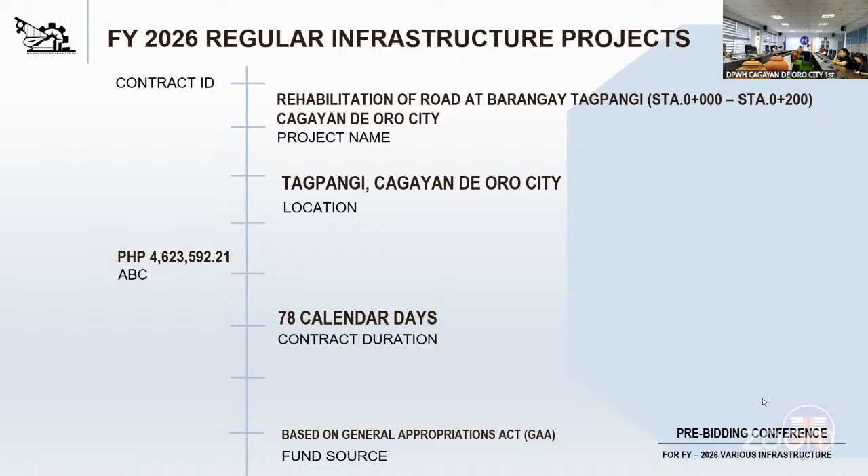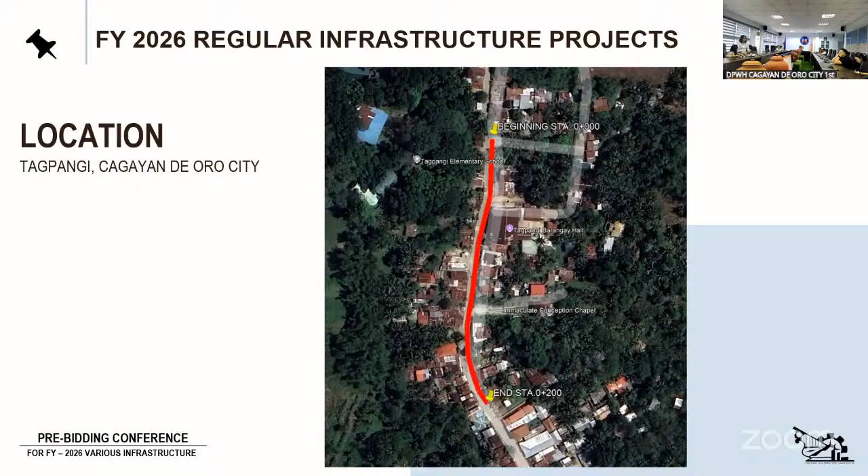The major landmark of the project is the Tagpangi Barangay Hall or Tagpangi Covered Court. This is the plan and profile of the project.

As you can see, the entire length of 200 meters has existing damaged or bad condition pavement to be removed and replaced with new PCCP. Then we have the additional proposed drainage system starting at station 0+80, the start of the proposed line canal, tapping to the existing line canal. Station 0+172 is the end of the proposed line canal.

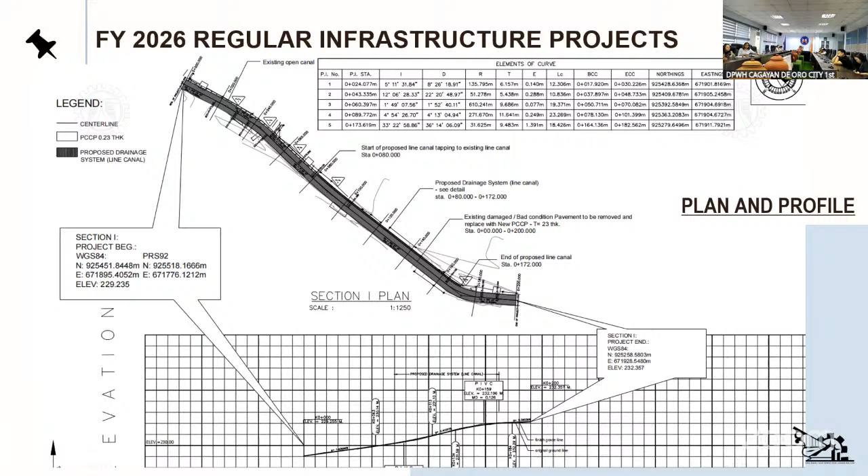This is the beginning and end of the new line canal. The beginning at station 0+80 is near the covered court, tapping to the existing line canal, and the end at station 0+172 is near the Soday store.

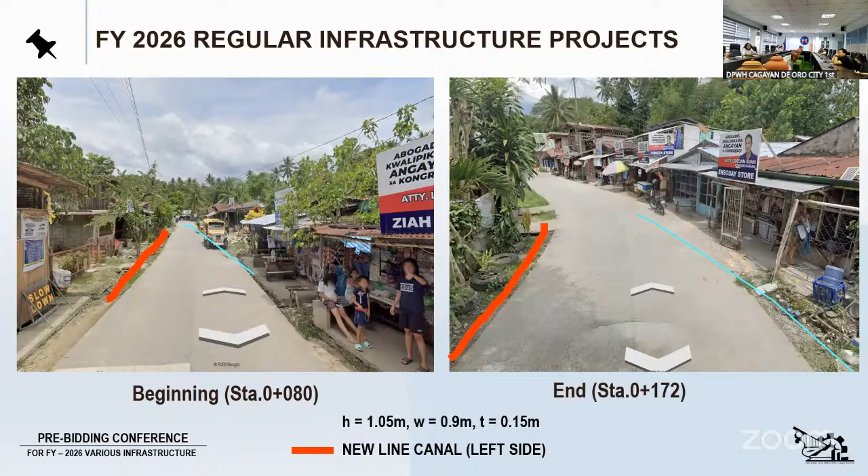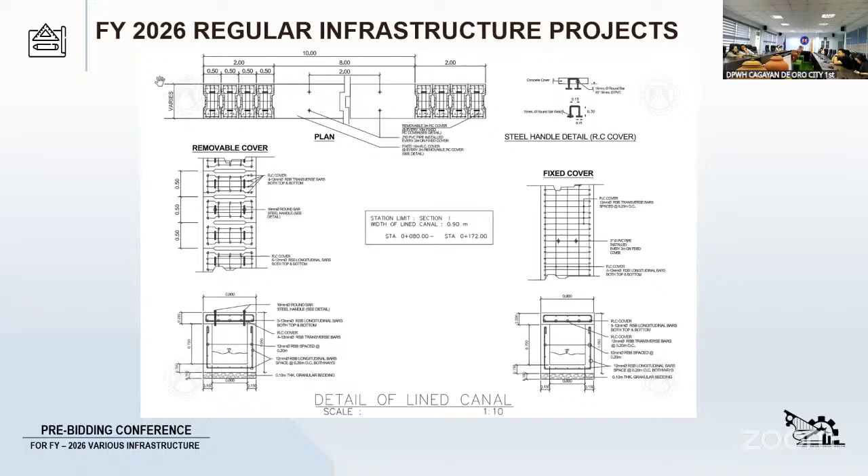This is the summary of quantity. In Part B, other general requirements: permits and clearances, 1 lump sum; project billboard or signboard, each; occupational safety and health program, 1 lump sum; traffic management, 1 lump sum; mobilization and demobilization, 1 lump sum. In highways, bridges and airports: removal of actual structures or obstruction; 0.23 meter thick PCCP unreinforced, 1,000 square meters; surplus common excavation, 407.10 cubic meters; structure excavation common soil, 86.94 cubic meters; embankment from borrow, common soil, 8.3 cubic meters; aggregate base course, 200 cubic meters; Portland cement concrete pavement unreinforced, 0.23 meter thick, 7 days, 1,000 square meters. In building, ports and harbors, flood control and drainage structure and water supply system: earthwork, gravel fill, 8.28 cubic meters.

In structural concrete, 4,000 PSI, Class A, 28 days, 48.3 cubic meters; reinforcing steel deformed grade 40, 3,954.65 kilograms.

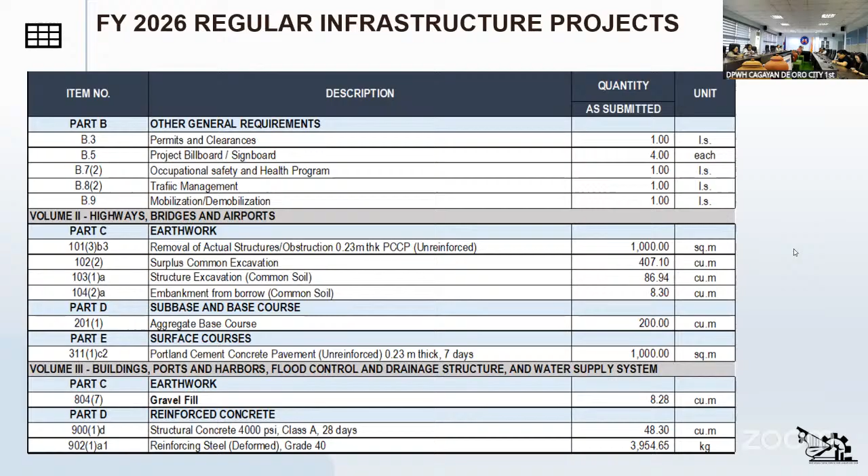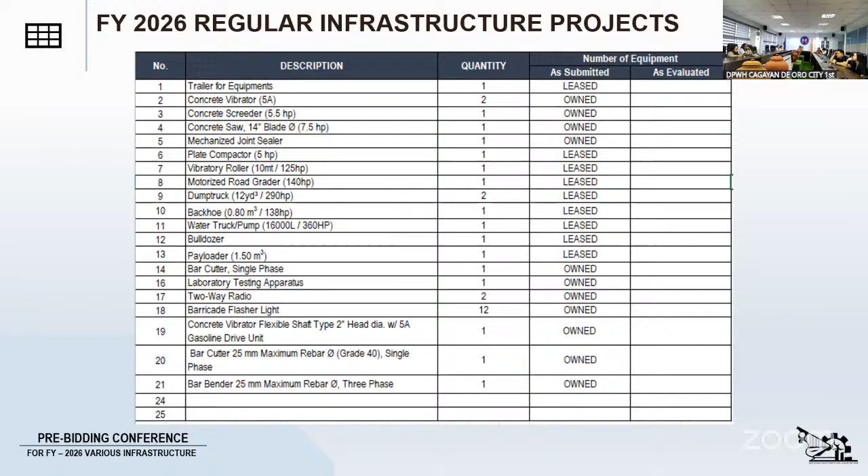Okay, and this is the end of my presentation. Thank you.

Thank you, Engineer Noynay. Do we have any questions, sir? How about the online viewers? There's none. Okay, let's proceed to the next project.

With contract ID number 26KH0042, Rehabilitation of road at Barangay Tuburan, Station 0.00 to Station 0+200, Cagayan de Oro City, Misamis. Engineer Calizo.

Good afternoon, everyone. On behalf of the designer and programmer, I will be presenting this project: Rehabilitation of road at Barangay Tuburan, Station 0 to Station 200. We have here a 200-meter length project with an ABC of 4,624,082.79, with 73 calendar days.

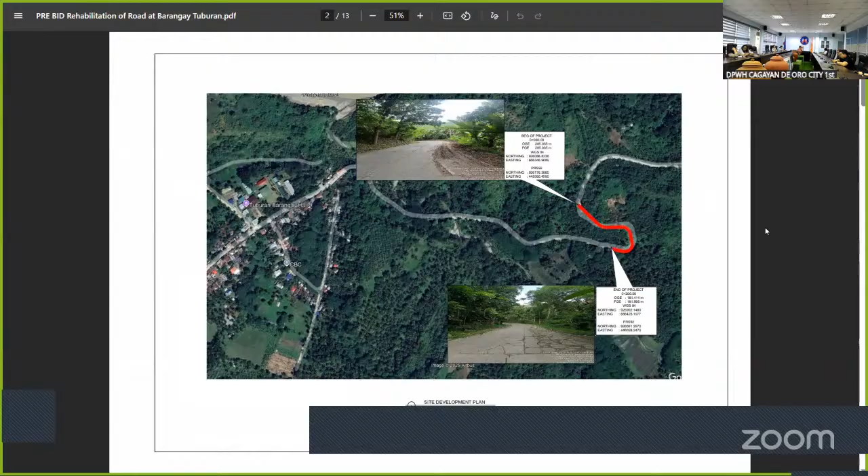Before we start, we have here the material testing requirements and equipment requirements: two-way radio, 3 units; barricade flasher light, 10 units; trailer for equipment, 1 unit; trailer for minor tools, 1 unit; backhoe with pavement breaker, 1 unit; payloader, 1 unit; dump truck, 2 units; concrete saw, 1 unit; bulldozer, 1 unit; backhoe, 1 unit; motorized road grader, 1 unit; vibratory roller, 1 unit; water truck pump, 1 unit.

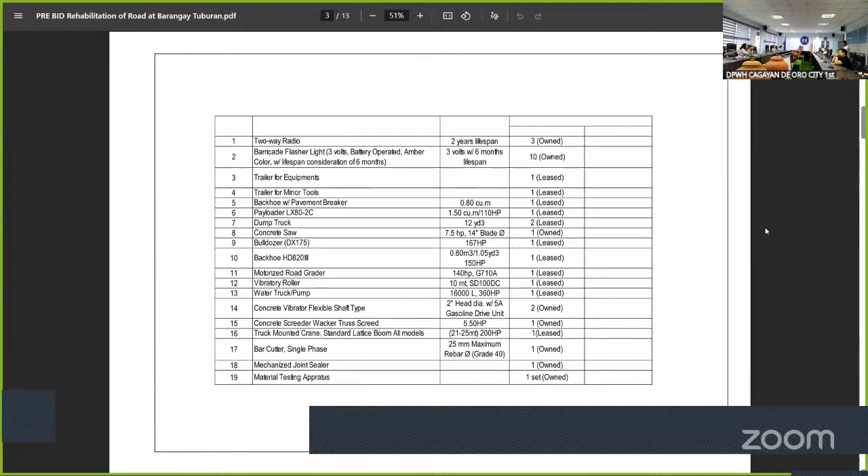Concrete vibrator, 2 units; concrete screeder, 1 unit; truck mounted crane, 1 unit; bar cutter, single phase, 1 unit; mechanized joint sealer, 1 unit; material testing apparatus, 1 set; plate compactor, 1 unit; bar bender 3 phase, 1 unit; and cargo service truck, all models, 1 unit. For our summary of quantities: B.3 permits and clearances, 1 lump sum.

B.5 project billboard and signboard, four each. B.7.2 occupational safety and health program, 1 lump sum. B.8.2 traffic management, 1 lump sum. And B.9 mobilization, demobilization, 1 lump sum.

For our earthworks, we have 1013B3 removal of actual structures, obstruction, 0.23 meters thick PCCP unreinforced, 1,000 square meters. 1022 surplus common excavation, 229.12 cubic meters. 1031A structure excavation, common soil, 13.5 cubic meters. 1042A embankment from borrow, common soil, 53.58 cubic meters.

For sub-base and base course, 2011 aggregate base course, 183 cubic meters. For surface courses, 3111C2 Portland cement concrete pavement, unreinforced, 0.23 meters thick, 7 days, 1,220 square meters. For miscellaneous structures, 6121 reflectorized thermoplastic pavement marking white, 49.45 square meters; 6122 reflectorized thermoplastic pavement marking yellow, 12 square meters; and 6249C1 single arm solar LED roadway lighting, 9 meters, 80 to 125 watts, 5 each.

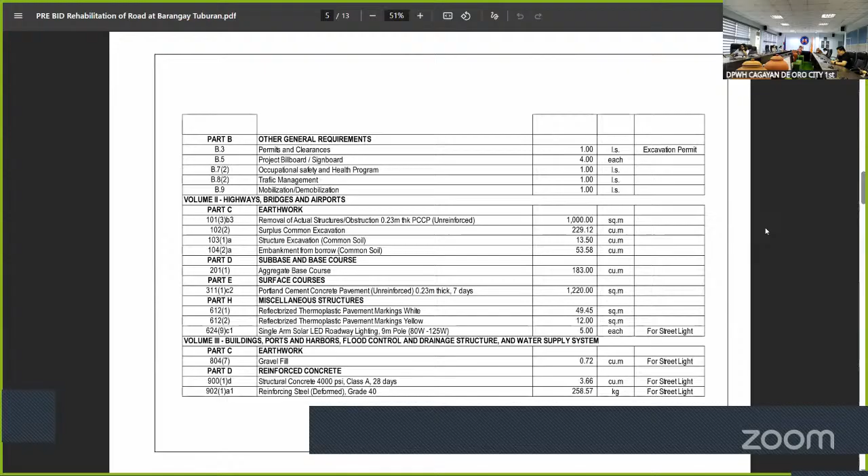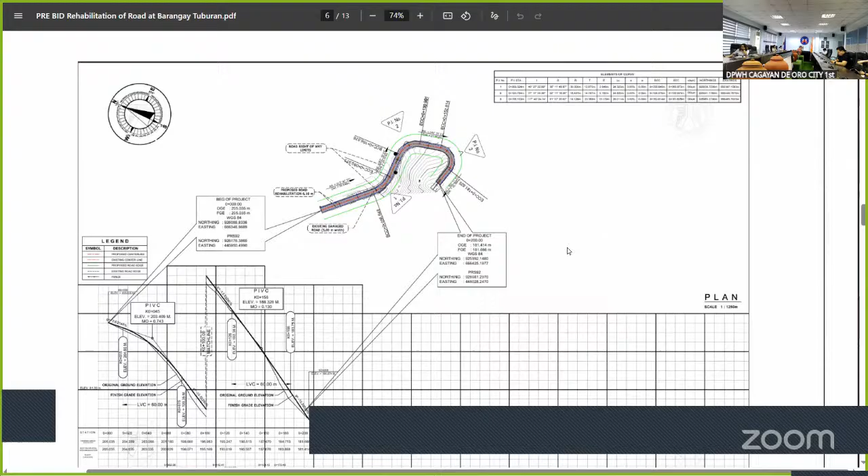For our typical sections, we will be having 3.05 meters with PCCP on both sides. You can see here the typical sections, also with sections that have solar street lights, thickness of 0.15 meters aggregate base course and 0.23 meters thick PCCP.

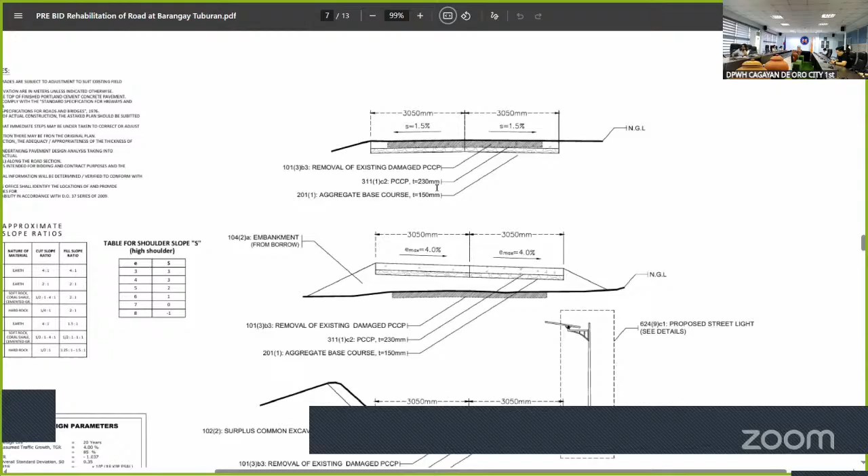We also have here the details of the typical pavement markings, since we will be having pavement marking along the rehabilitation of the road. These are the details of our reblocking.

And for our cross sections, we have here road soil test reports as attachments for the site, and also our road right-of-way attachments.

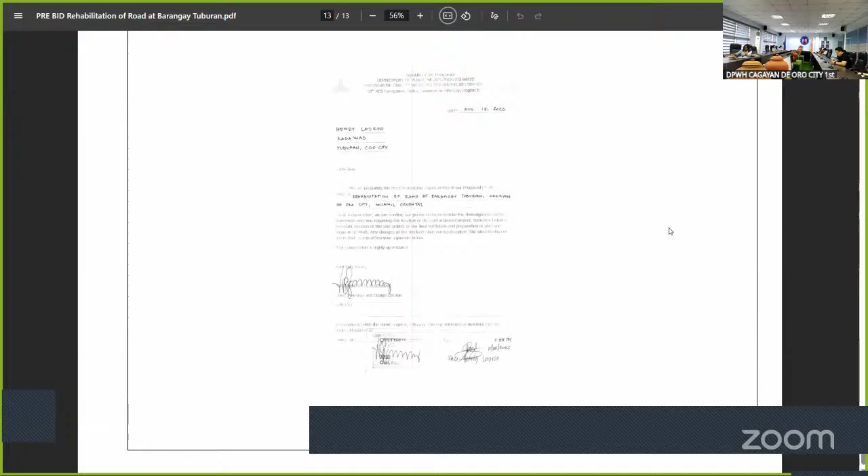So that's all for this project. Thank you, and any questions?

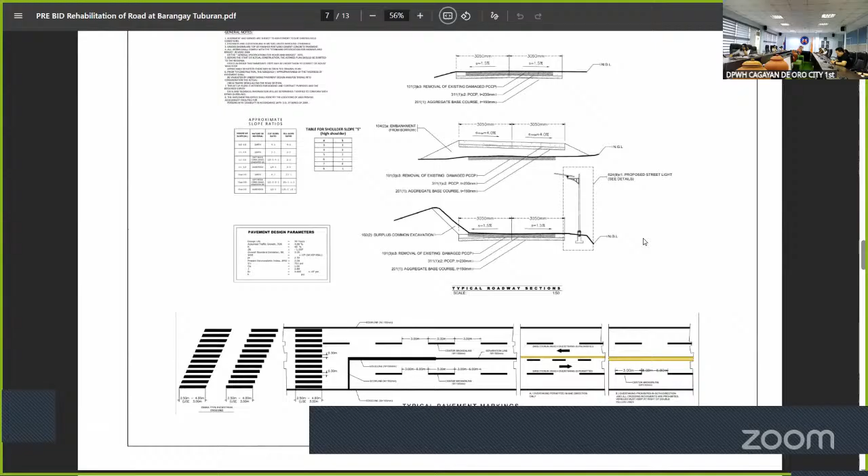Let's proceed to the next project, with contract ID number 26 AH 0043, rehabilitation of road, Barangay Besigan, station 0+00 to station 0+200 of this city, to be discussed by Engineer Kalis. Good afternoon again, everyone. Rehabilitation of road at Barangay Besigan, station 0 to station 200, Cagayan de Oro City, Misamis Oriental.

We have a station 0 to station 200 with a net length of 200 meters. Approved budget for the contract is 4,622,247.02, with project duration of 74 calendar days. The scope of work is

construction or improvement of existing road to gravel or paved road with width of 2.5 meters both sides and thickness of 0.2 meters thick PCCP. We also have construction of gravel shoulder with width of 0.7 meters both sides and construction of RC pipe culverts, slope protection, grouted riprap and stone masonry.

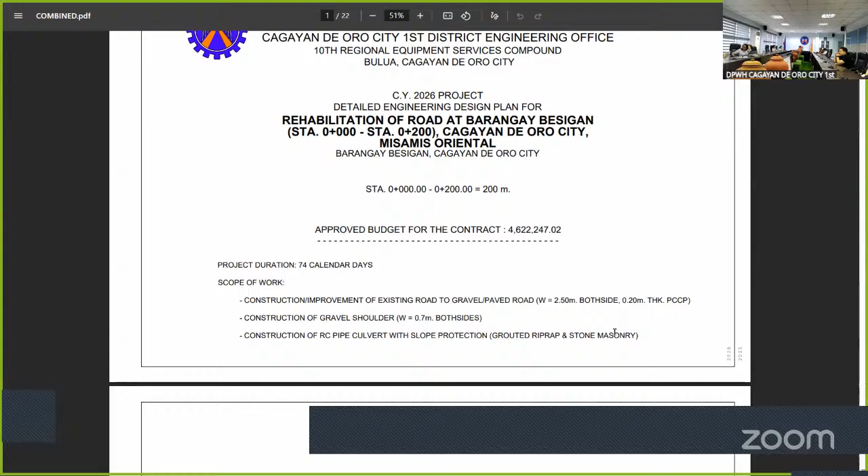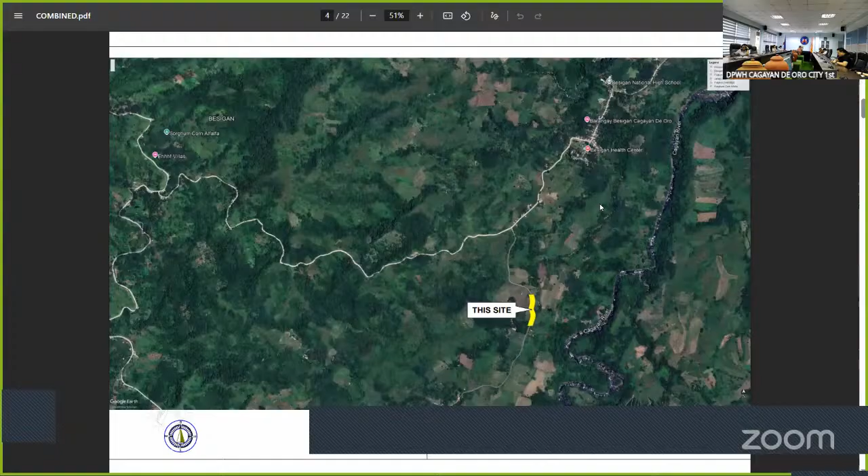So general drawing is located at Barangay Besigan. This is the location map, after Barangay Besigan. For specifics, this is situated at Barangay Sitio Kibanog.

This is our site development plan. This is after the previous project of ours, our FMR at Sitio Kibanog. So we will be just continuing the project.

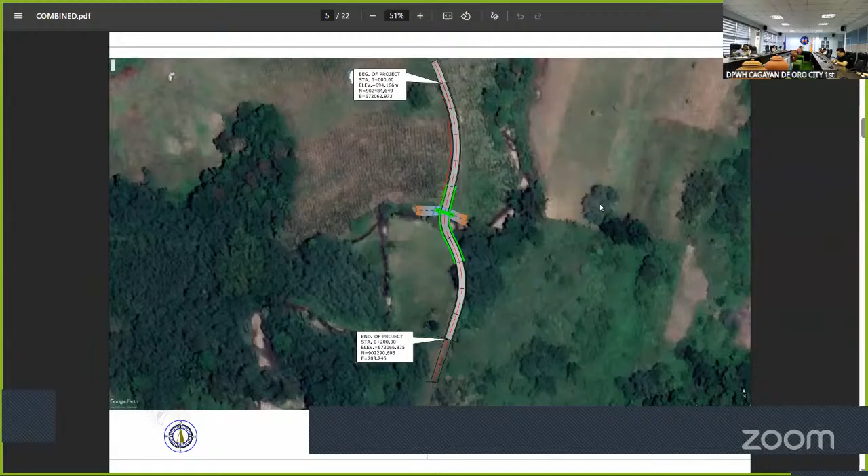This is the site development plan. We also have here the disposal map and geotag pictures of the site. Again, we will be crossing a waterway, which will be discussed on the plan.

For our plan and profile, this is our plan and profile. Again, we will be crossing a natural waterway, which will be implementing RC pipe culverts, to be discussed later. This is the plan and profile and the elevations of the pipe culvert.

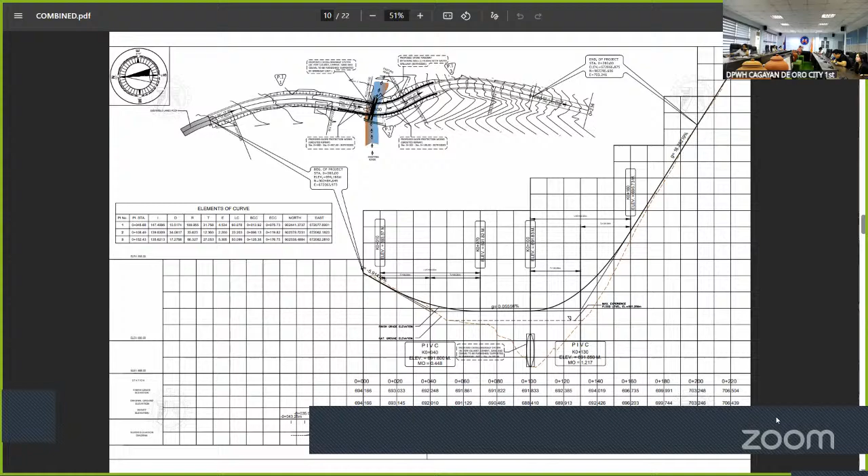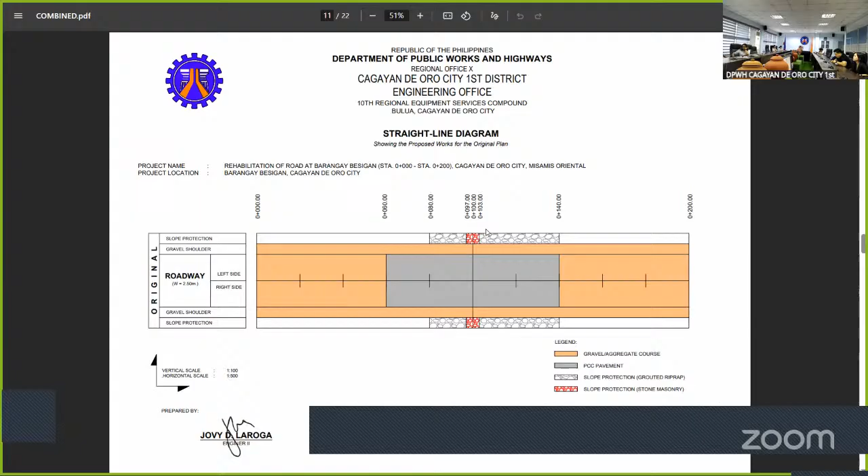This is the straight line diagram showing this project will have a whole stretch of 200 meters aggregate base course, just a base course. Then you can see here the gray one, this will be the station limit of only the PCCP pavement for the carriageway. Also shown here are the stations of the slope protections, in the section of the waterway.

For our typical drawings, these are the typical drawings. Again, from what I mentioned earlier, typical section 1, the whole stretch will be having the aggregate base course, thickness of 0.1 meters thick. There's also a station limit here, as you can see in the table, where the PCCP carriageway will be. We will have an 80 meters carriageway and gravel carriageway of 120 meters.

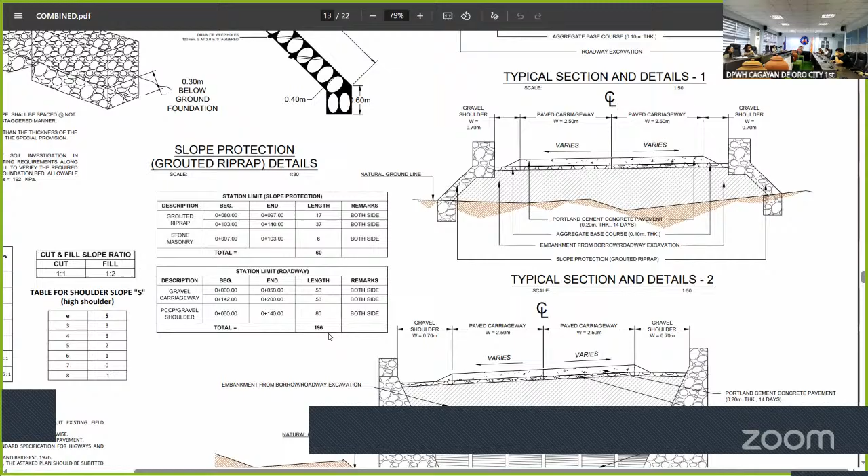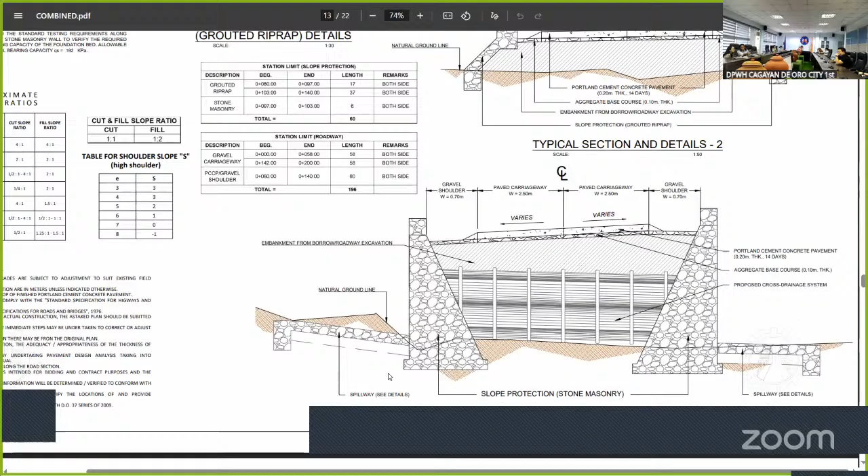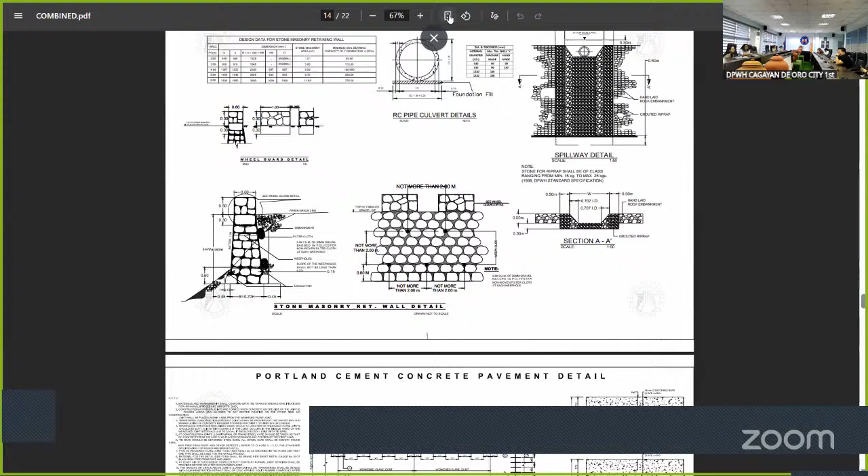These are also the details for the slope protections. We will be having the grouted riprap before the waterway, and as for the waterway, we will be having slope protection of stone masonry in between erected RC pipe culverts. We also have installations of spillways on both sides. These are the details of the slope protections, the stone masonry and its wheel guards.

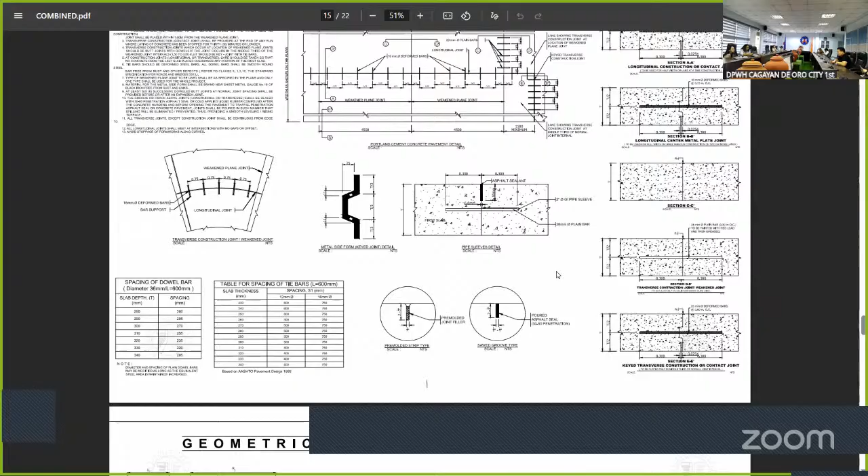So for our PCCP details and geometric design standard drawings.

For our summary of quantities, we have here B.3 permits and clearances, 1 lump sum. B.5 project billboard signboard, 4 each. B.7.2 occupational safety and health program, 1 lump sum. B.8.2 traffic management, 1 lump sum. B.9 mobilization demobilization, 1 lump sum.

1041A embankment from roadway structure excavation, common soil, 219.05 cubic. 1042A embankment from borrow, common soil, 938.76 cubic. 2011 aggregate base course, 139.03 cubic. 3111B1 Portland cement concrete pavement, unreinforced, 0.2 meters thick, 14 days, 400 square meter. 5001E culverts, class 4 RCPC, 18 linear meter. 5052A grouted riprap, class A, 187.62 cubic. 5061 stone masonry, 69.79 cubic.

For our minimum equipment requirement, we have here backhoe, 1 unit, payloader, 1 unit, motorized road grader, 1 unit, vibratory roller, 1 unit, water truck pump, 1 unit, plate compactor, 1 unit, transit mixer, 4 units, concrete vibrator, 2 units, concrete batch plant, 1 unit, concrete spreader, 1 unit, concrete saw, 1 unit, bar cutter single phase, 1 unit, joint sealer machine, 1 unit, 1 bagger mixer, 1 unit, backhoe wheel mounted, 1 unit, material testing apparatus, 1 unit, two-way radio, 2 units, and barricade flasher light, 12 units.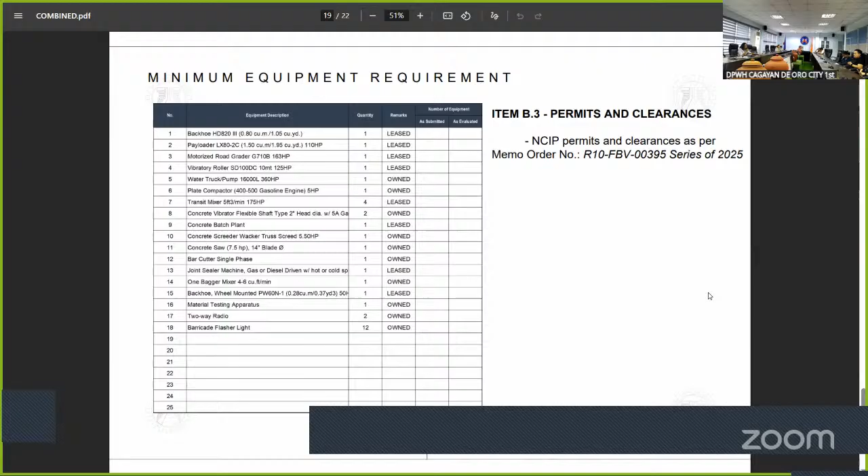Rehabilitation of road at Barangay Pigsag-an, Station 0 to Station 200, Cagayan de Oro City, Misamis Oriental. Net length of 200 meters with an ABC of 4,607,919.87 and project duration of 72 calendar days.

Scope of work is rehabilitation of existing road with PCCP width of 2.5 meters both sides, 0.28 meters thick, since we will be improving the existing paved road. There's also an installation of solar street lights.

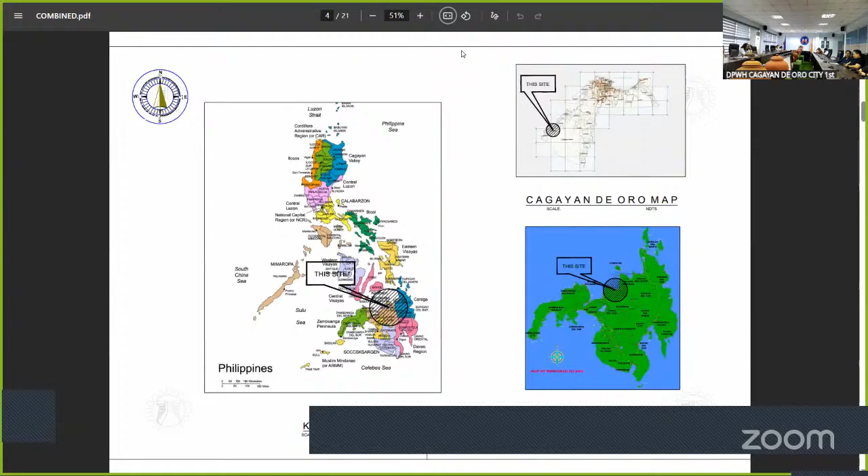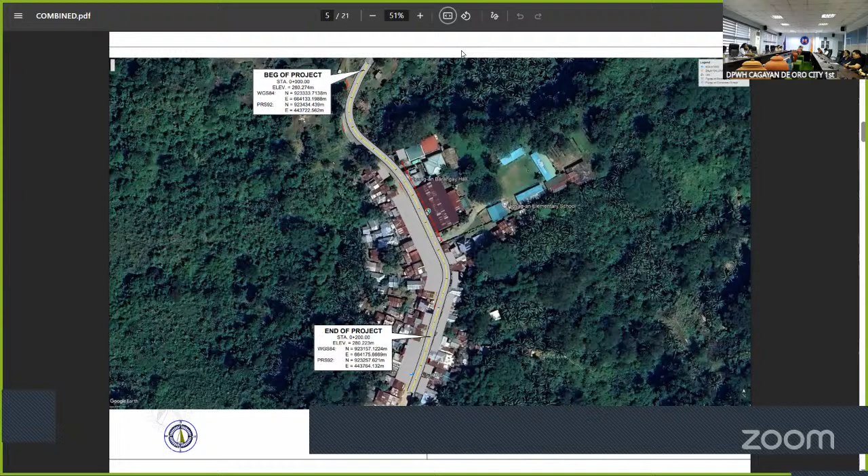General drawing, it is located in Barangay Pigsag-an. For specifics, this is the site development plan, situated in front of Pigsag-an Barangay Hall. So we will have a 200 meters rehabilitation of the existing road.

So for our plan profile, we have here the plan profile, also accompanied with the stationing of our solar street lights. We have 3 solar street lights situated where there's availability of space. We have here the stationing of street lights.

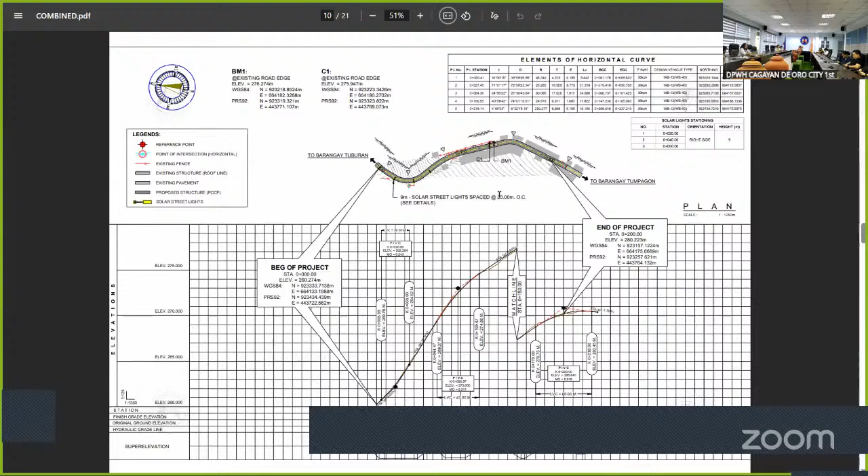So for our straight line diagram, this is the straight line diagram. We will just be having rehabilitation of roadway, a width of 2.5 meters, also the installation of solar LED roadway lighting.

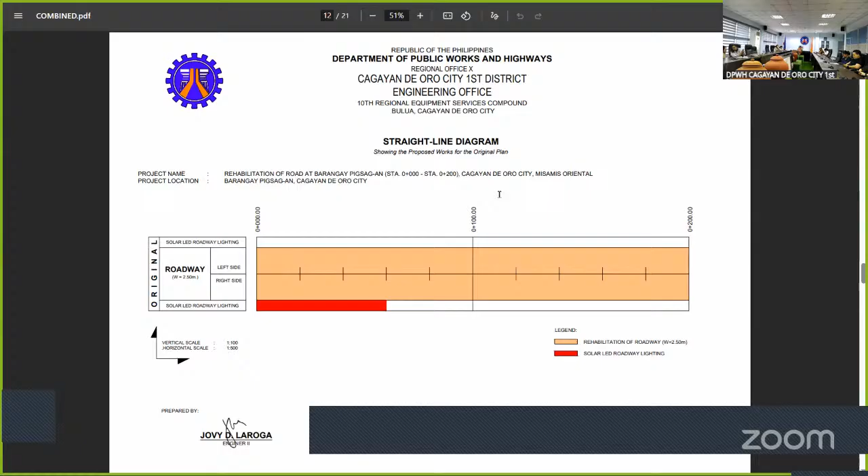For our summary of quantities, we have here B.31 permits and clearances, 1 lump sum; B.5 project billboard and signboard, 4 each; B.72 occupational safety and health program, 1 lump sum; B.81 traffic management, 1 month; B.9 mobilization demobilization, 1 lump sum.

1013B3 removal of actual structure obstructions, 0.23 meters thick, PCCP unreinforced, 1,000 square meter. 1022 surplus common excavation, 496 cubic meter. 1031A structure excavation common soil, 4.75 cubic. 1047 gravel fill, 0.43 cubic.

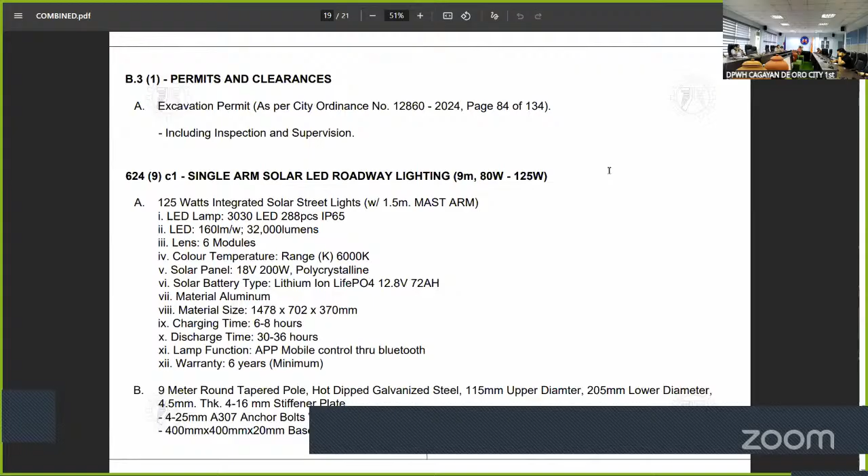So that's all for this project. Thank you, and any questions?

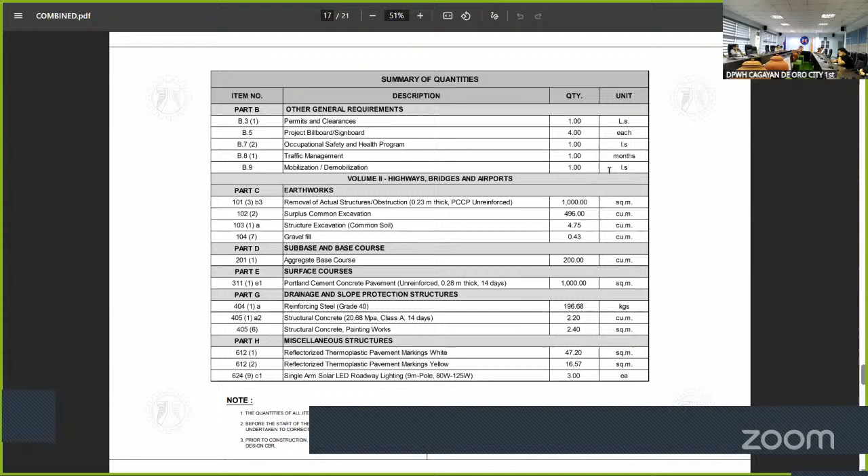Ms. Aguilar, since there is no questions, let's proceed to the last project to be discussed also by Engineer Talisa. The contract ID is 26AH0045, rehabilitation of road, Barangay Tumpagon, station 0+00 to station 0+200, PCCP.

Rehabilitation of road at Barangay Tumpagon, Station 0 to Station 200, Cagayan de Oro City. Net length of 200 meters. ABC of 4,624,593.77, and project duration is 65 calendar days.

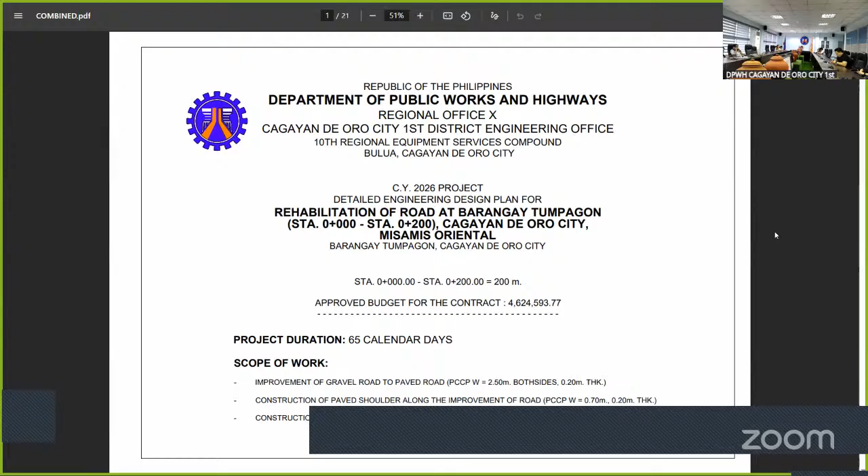Scope of work is improvement of gravel road to paved road, PCCP, with width of 2.5 meters both sides, and thickness of PCCP is 0.2 meters thick. There's also a construction of paved shoulder along the improvement of road with width of 0.7 meters, thickness of 0.2 meters thick, and also construction of open line canal along the improvement of road with material grouted riprap.

So general drawing, it is located in Barangay Tumpagon. This is the site image or the location map. It is situated before the Tumpagon National High School.

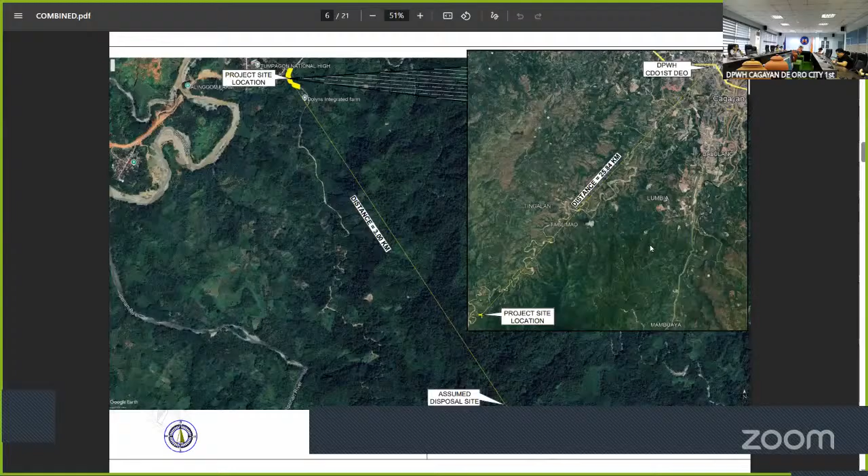So this is the site development plan. So this is the disposal site plan. And for the images, this is the site image of the beginning section. You can see here, this is before we arrive at the center of Tumpagon. So this will be our project.

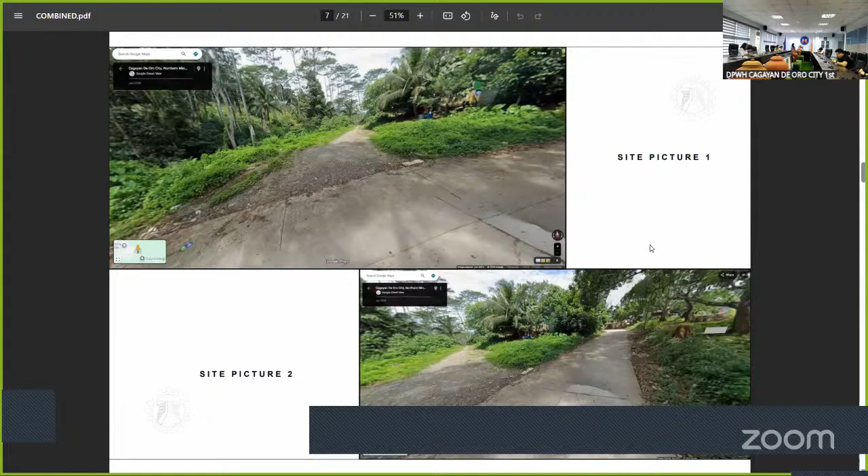For plan profile, this is the plan profile for the 200-meter project. We also have a solar street light inclusion. So there's also a stationing of the solar street lights inclusion.

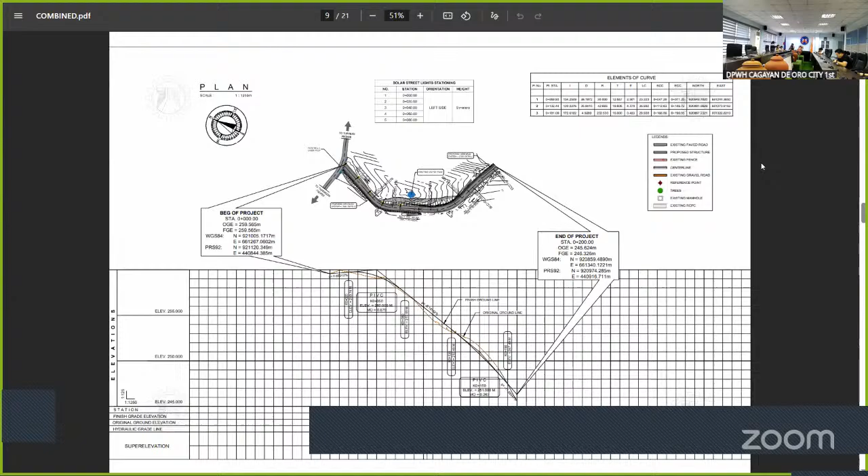So these are our straight line diagram, where we will just be having an improvement of the existing gravel road to paved road, and also the construction of line canal. Both sides of every line canal has its own natural waterway, natural outfall, and also the indication of the solar street light stationing.

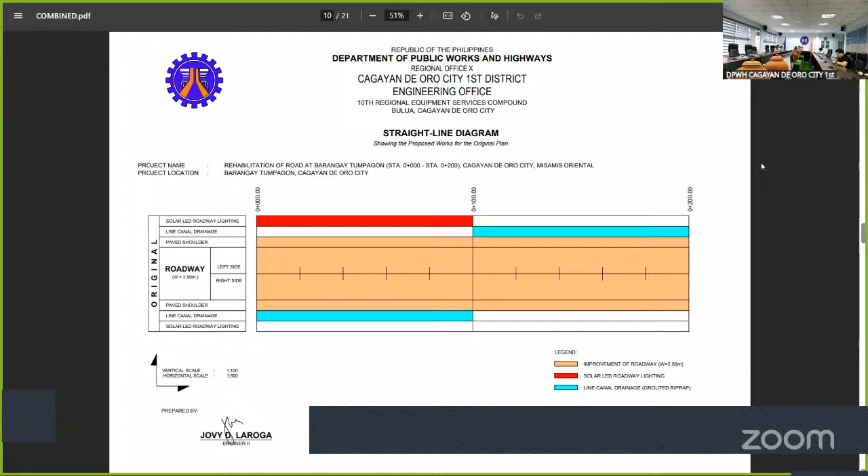So for our typical drawings, this would be our typical section. We will be having 2.5 meters width both sides and additional 0.7 meters both sides shoulder, and construction of line canal, grouted riprap, and also the installation of solar street lights. There's also an inclusion of reflectorized thermoplastic pavement marking. You can see the details on the left side.

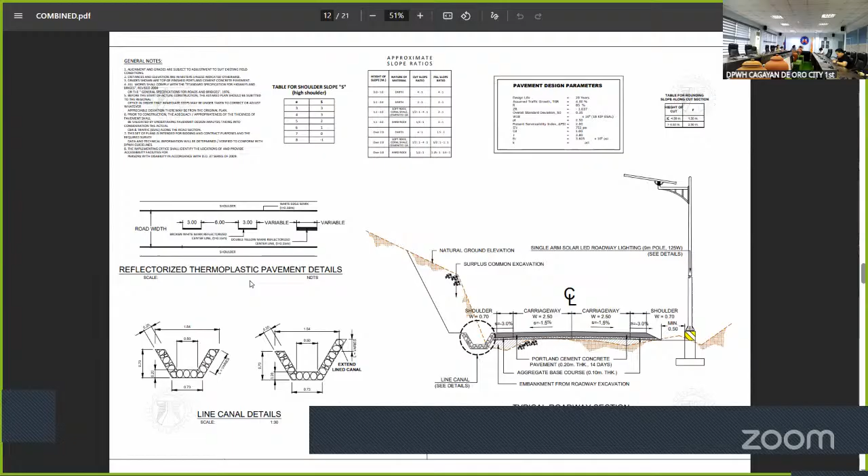So these are the details of our PCCP. Geometric design standard drawings.

So for our summary of quantities, we have here B.3 permits and clearances, 1 lump sum; B.5 project billboard and signboard, four each; B.7, occupational safety and health program, 1 lump sum; B.8, traffic management, 1.43 months; B.9 mobilization demobilization, 1 lump sum; 1022 surplus common excavation.

1,668.46 cubic meters; 1031A structure excavation common soil, 7.92 cubic meters; 1041A embankment from roadway structure excavation common soil, 160.03 cubic meters; 1047 gravel fill, 0.72 cubic meters; 2011 aggregate base course, 141.16 cubic meters.

3111B1 Portland cement concrete pavement unreinforced, 0.2 meters thick, 14 days, 1,280 square meters; 4041A reinforcing steel grade 40, 327.8 kilograms; 4051A2 structural concrete 20.68 megapascal class A, 14 days, 3.66 cubic meters; 4056 structural concrete painting works, 4 square meters.

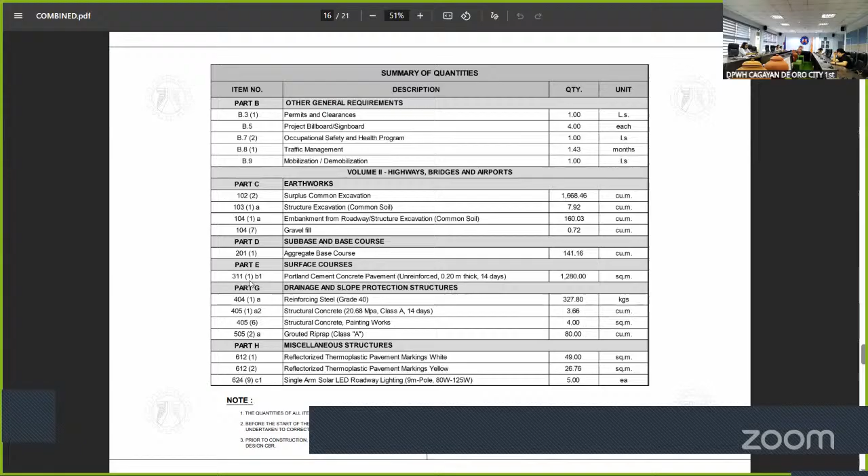5052A grouted riprap class A, 80 cubic meters; 6121 reflectorized thermoplastic pavement markings white, 49 square meters; 6122 reflectorized thermoplastic pavement marking yellow, 26.76 square meters; 6249 C1 single arm solar LED roadway lighting, 9 meter pole, 80 to 125 watts, 5 each.

For our minimum equipment requirement, we have here backhoe 1 leased, dump truck 2 owned, bulldozer 1 leased, payloader 1 leased, motorized road grader 1 leased, vibratory roller 1 leased, water truck pump 1 owned, plate compactor 1 owned, transit mixer 4 leased, concrete vibrator 2 owned, concrete batch plant 1 leased, concrete skidder 1 owned, concrete saw 1 owned.

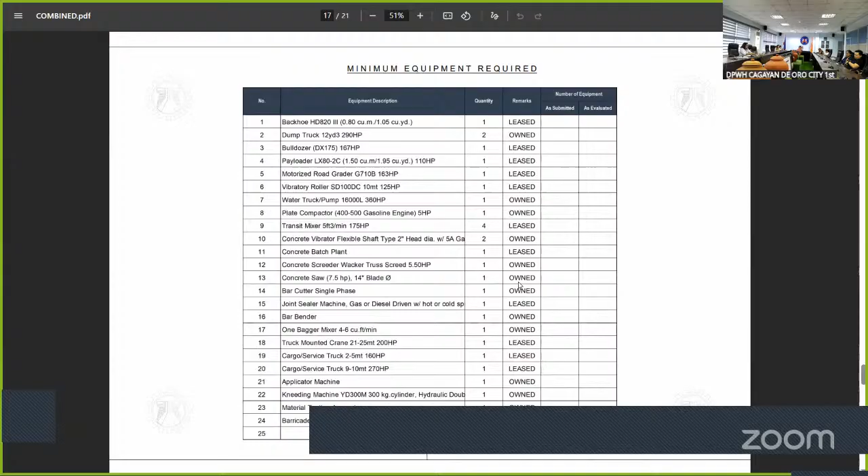Bar cutter 1 owned, joint sealer machine 1 leased, bar bender 1 owned, bagger mixer 1 owned, truck mounted crane 1 leased, cargo service truck 2 to 5 metric ton 1 leased, cargo service truck 9 to 10 metric ton 1 leased, applicator machine 1 owned, kneading machine 1 owned, material testing apparatus 1 owned, and barricade flasher light 4 owned.

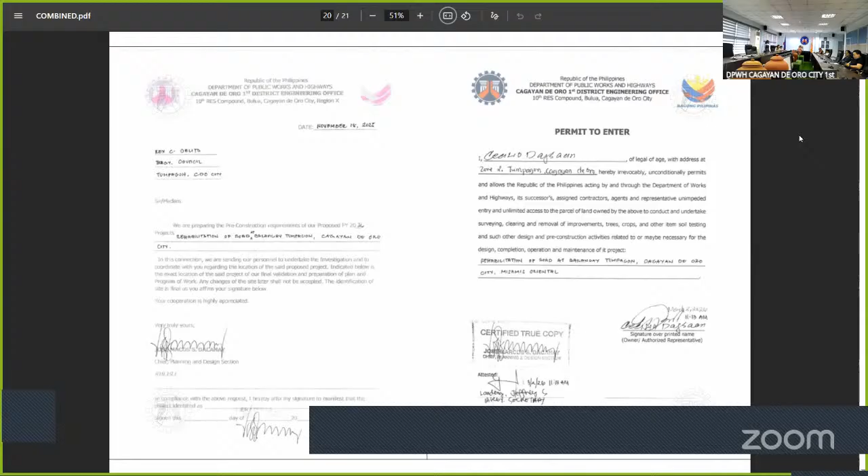So for our permits and clearances, we have here an inclusion of NCIP permits and clearances as per memo order number R10 FBV 00395 series of 2025, and also our specifications of our single arm solar LED roadway lighting. We also have here our attachments for our road right of ways, and our soil test reports.

So that's all for this project. Thank you, and any questions?

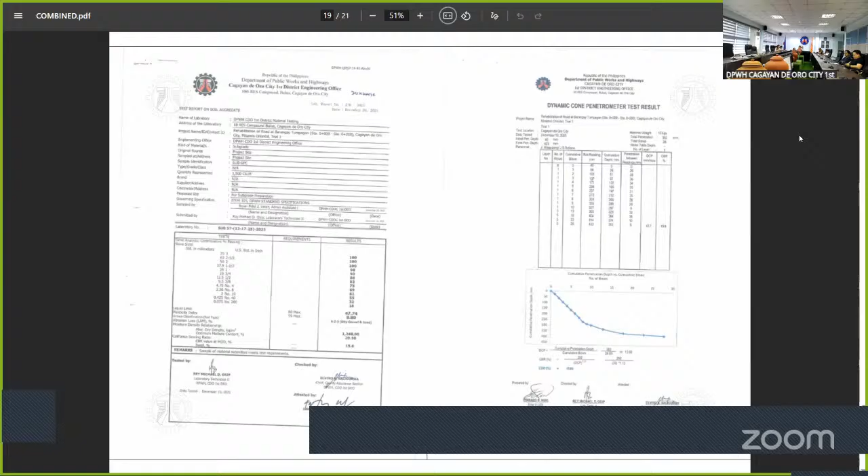Okay, Liz, thank you.

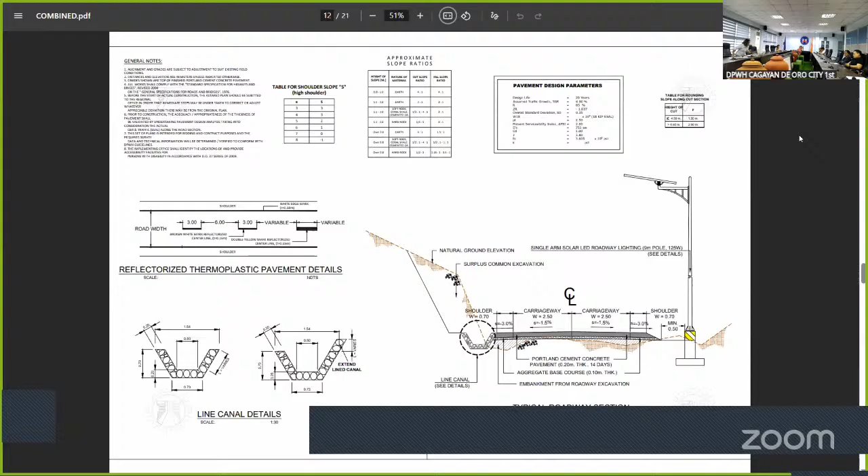Next, we will now go through the salient provisions of the bidding documents to be discussed by our bids and awards committee secretariat. May we request Engineer Galudo to discuss the requirements for the eligibility and financial, also the schedule of the bidding or the opening.

Okay, Chair. Go ahead. Good afternoon, Madam Chair, and good afternoon, everyone. I will be discussing the procurement requirements and procedures for this civil works project.

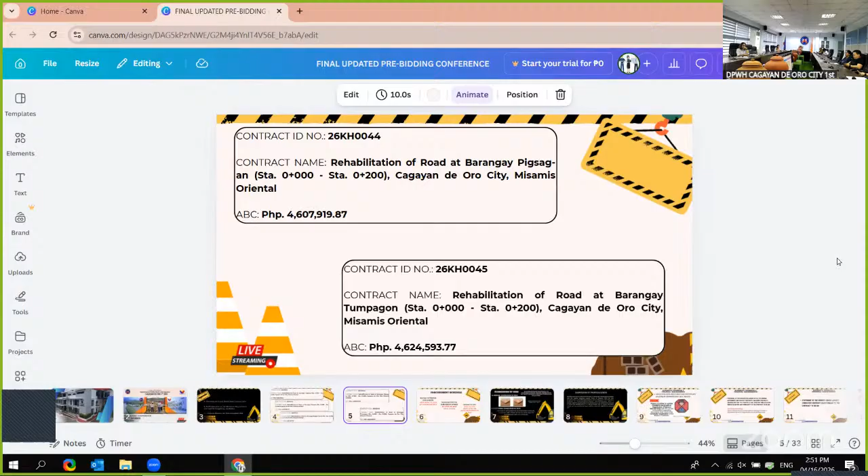So for the procurement schedule, the buying of tender documents is until April 29, 2026 at 12 noon only. The deadline for the submission of bids will be on April 29, 2026 until 2 p.m. And the opening of bids will follow right after the deadline.

Excuse me, the buying, I'll repeat, the buying of tender documents is until, it's morning, April 29, 2026. Currently, sorry for the technical issue with the presentation.

Okay, for the procurement schedule, the buying of tender documents is until April 29, 2026 at 9:30 AM only. The deadline for the submission of bids will be on April 29, 2026 until 10 AM. And the opening of bids will follow right after the deadline or the drafting of bids.

For the bid submission, it may be done manually or electronically. However, bidders should only select one mode, either manual or electronic. For the manual submission, we have the two envelope system, wherein the first envelope contains the technical components of the bids, and the second envelope will contain the financial component of the bids. These envelopes have the original, copy 1, and copy 2 of the bidding documents. For the electronic submission, the details are stated in the bid data sheet in accordance with Department Order 87 series of 2020.

Bid proposals may be submitted through an authorized representative together with the original notarized special power of attorney or SPA for sole proprietorship, or board or partnership, or joint venture resolution with secretary's certificate for corporations, partnerships, joint ventures, or cooperatives, which is contract specific, presentation of any company ID or any government issued ID, to ensure that their representative is an official member and to prevent fraudulent actions such as unauthorized use of another contractor's eligibility for personal gain.

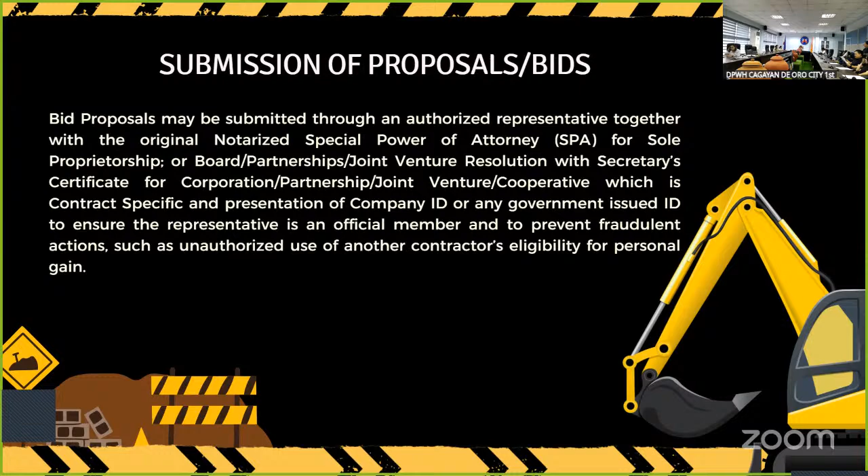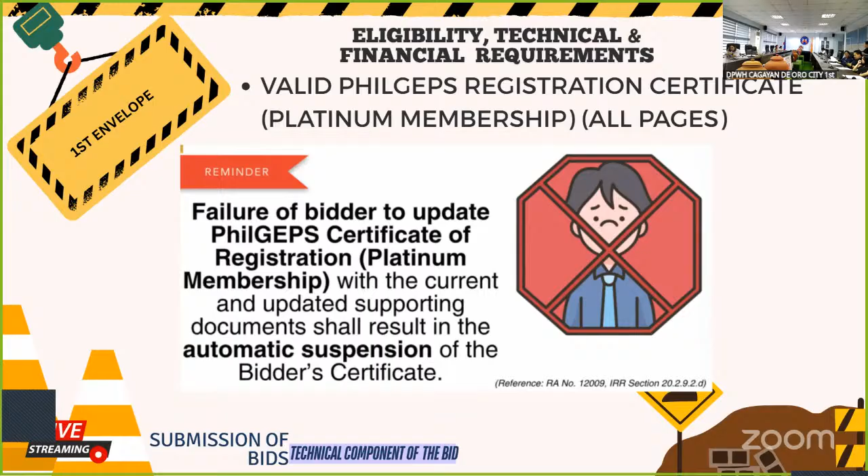So for the first envelope, the bidder must provide a valid PhilGEPS registration certificate in platinum membership in all pages. Failure of the bidder to update the PhilGEPS certificate of registration shall result in an automatic suspension of the bidder's certificate.

Next, the bidder must provide a statement of all of its ongoing government and private contracts, including contracts awarded but not yet started. Take note that failure to disclose the required information or providing incomplete or false details may result in disqualification from the bidding process.

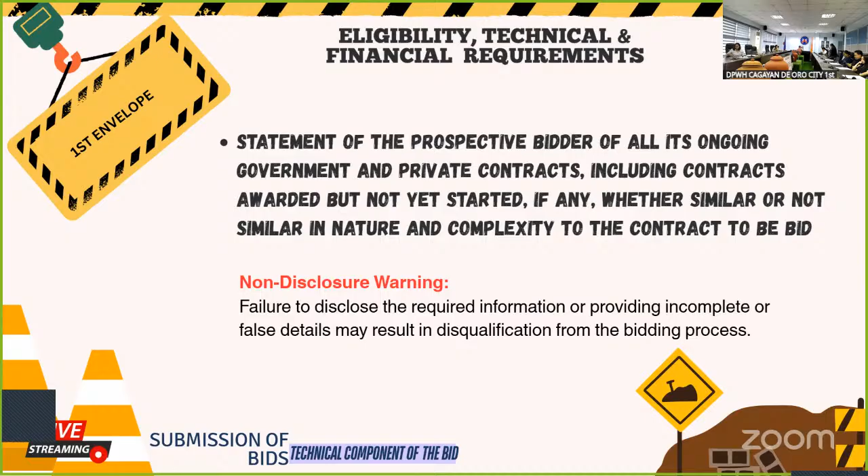And also, the bidder must provide a statement of single largest completed contract or SLCC, and also they must provide a PCAB license or special PCAB license in case of joint venture.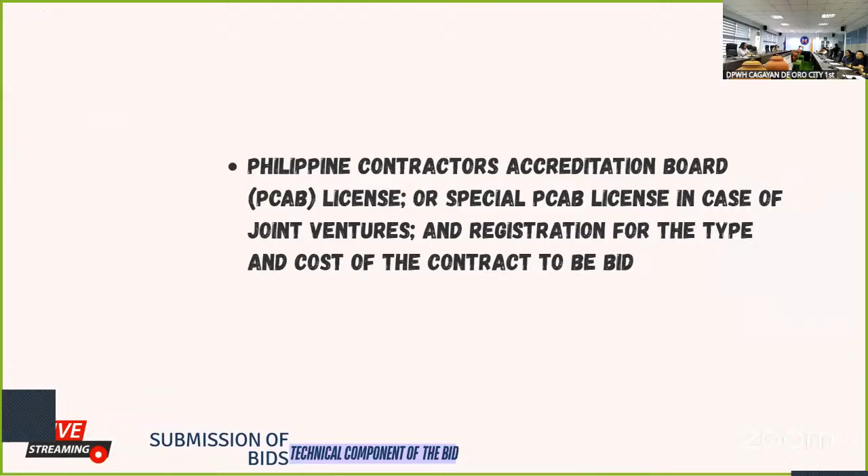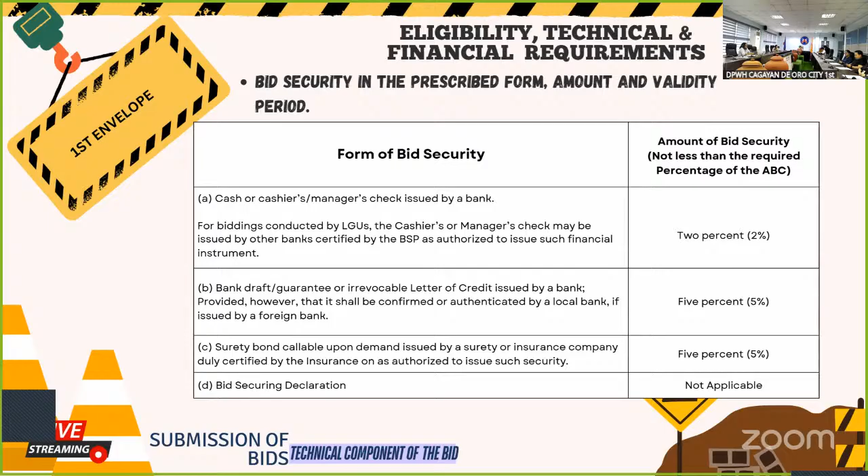And the bidder must also provide a bid security. Here we have 4 forms of bid security, and the bidder will only choose one form to be submitted. We can choose the cash or cashier's check, the bank guarantee, the surety bond, or the bid securing declaration.

So this is the standard form for the bid securing declaration.

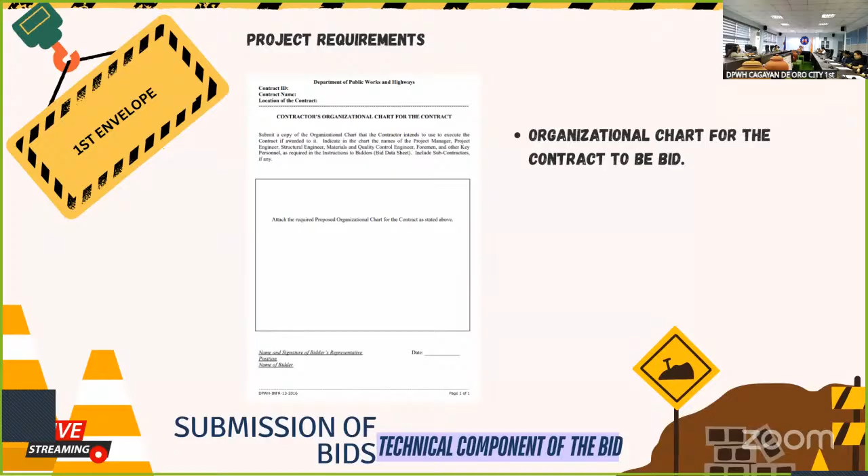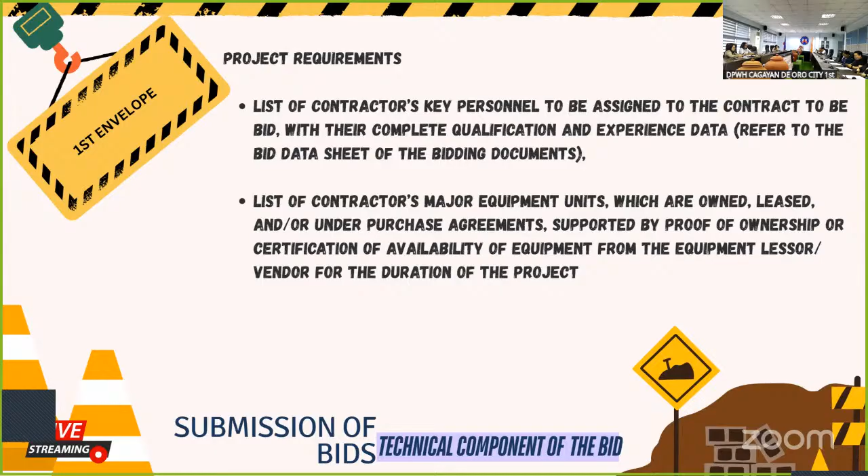And also the bidder must provide an organizational chart for the contract, the list of contractors' key personnel, and the list of contractors' major equipment units which are owned or under purchase agreement. Please see the attached bidding documents for the required number of years for the key personnel and the required number of equipment for the major equipment.

And these are the standard forms for the key personnel and for the major equipment.

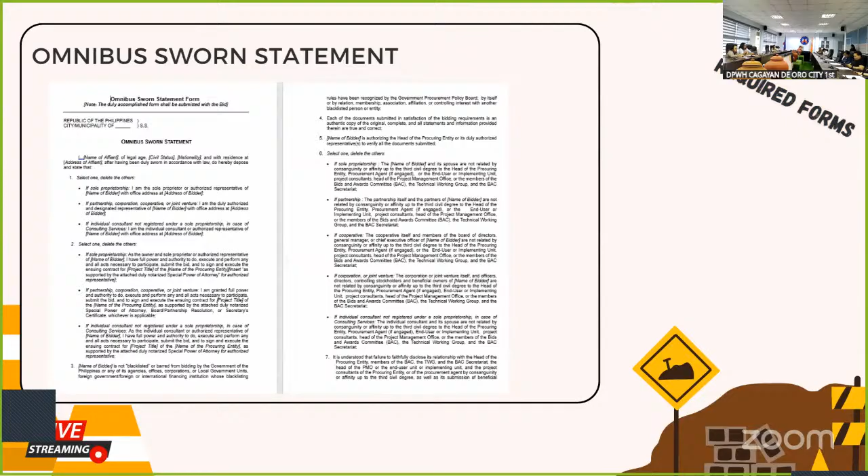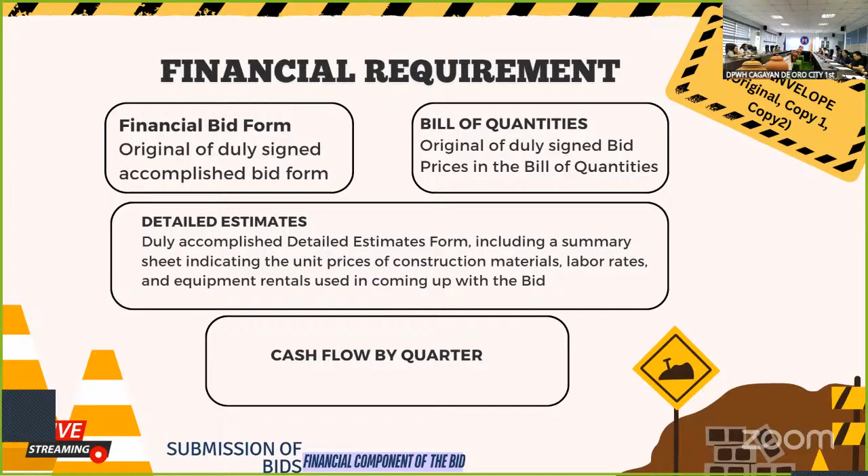And next, for the second envelope, which contains the financial component of the bid, the bidder must provide an original and duly signed and accomplished financial bid form, the bill of quantities, the detailed estimates, and the cash flow by quarter.

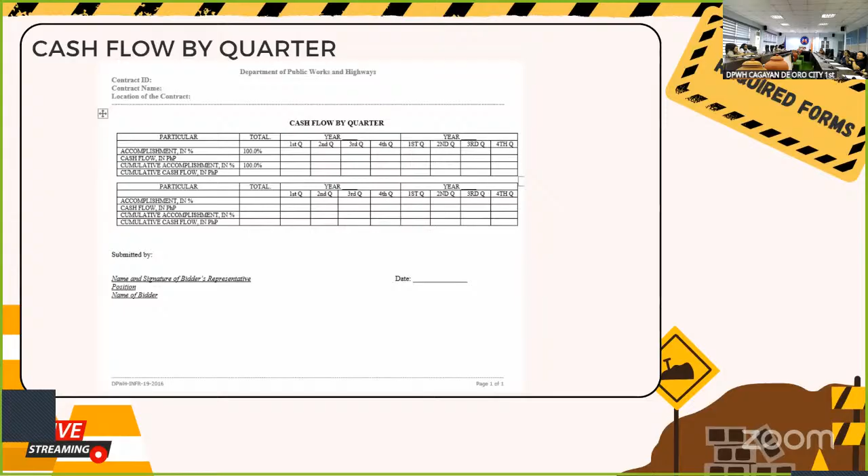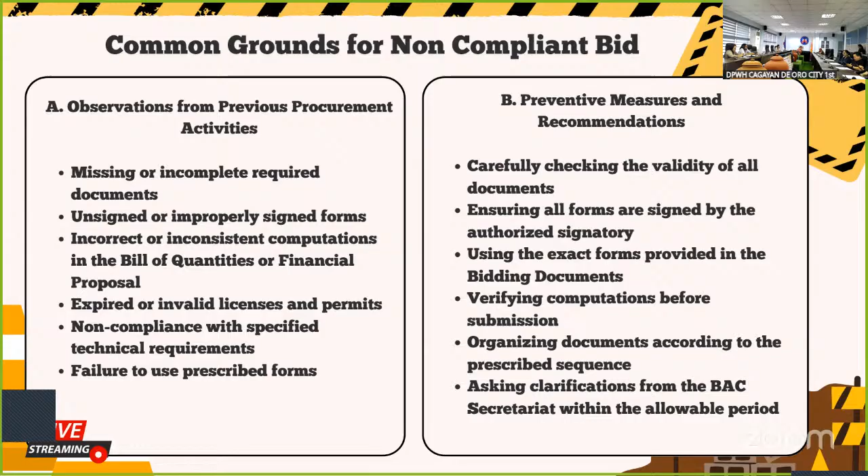And next, we have the preventive measures and recommendations. First, carefully checking the validity of the documents, ensuring all forms are signed by the authorized signatory, using the exact form provided in the bidding documents, verifying computations before submission, organizing documents according to the prescribed sequence, and asking clarifications from the BAC secretariat within the allowable period.